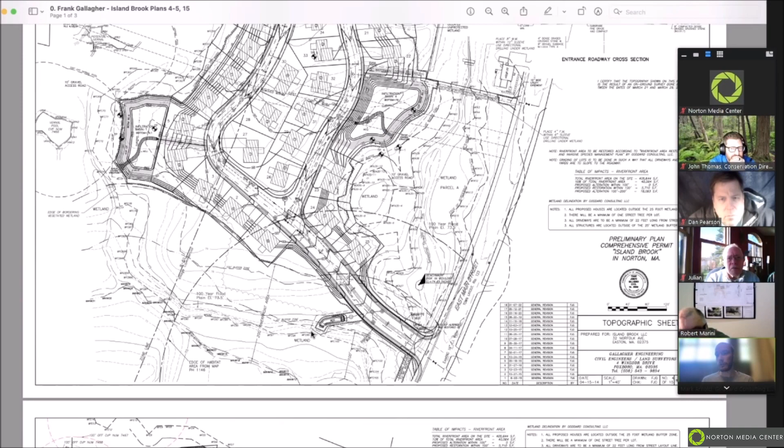In addition, since it's been many years on this project, the wetland line was reviewed along with the vernal pool flagging by Mass DEP as part of this process. There was a reduction in wetland impacts from 790 square feet down to 170 square feet of permanent impacts.

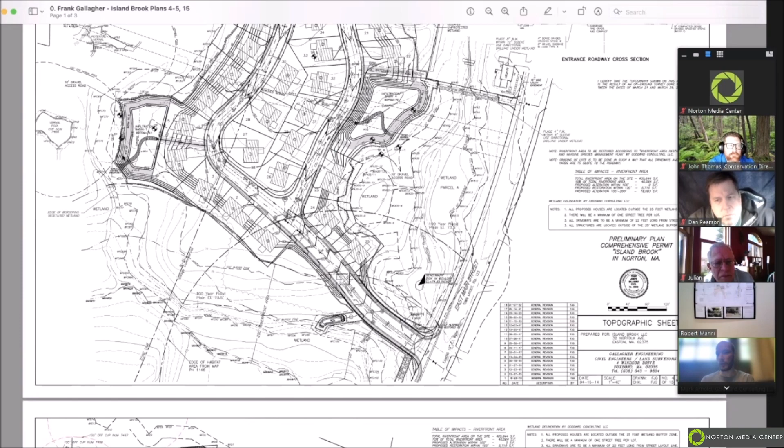Basin 1 and Basin 2 also saw reductions in work. This is Basin 1, where work was tightened in the buffer zone so all work is no longer within 100 feet of a vernal pool, whether potential or certified. Basin 2 is over here, where work was again tightened up to maintain 100 feet of setback from the certified vernal pool.

In addition, there was reconfiguration of the other basins in small ways, changing of grades to respond to DEP's comments about how stormwater was flowing, making sure discharges and volumes were maintained. Finally, there were some minor roadway elevation changes that occurred—these plans would be hard to tell, but they did occur.

There was additional work to pull back from this isolated wetland, which is no longer being impacted in any way. This other isolated wetland is still being proposed to be impacted, and Mass DEP is making that clear in the settlement discussions. The purpose of the settlement is to prepare a final order of conditions.

Last, there was an update to the Riverfront Area Invasive Species Management and Restoration Plan, put together working with Natural Heritage, which has endangered species freshwater mussels mapped within the Rumford River. Part of that work is improving the riverfront area near the actual endangered species habitat mapped by Natural Heritage. That was updated to reflect the updated plans, since the ISMP was using the old site plans.

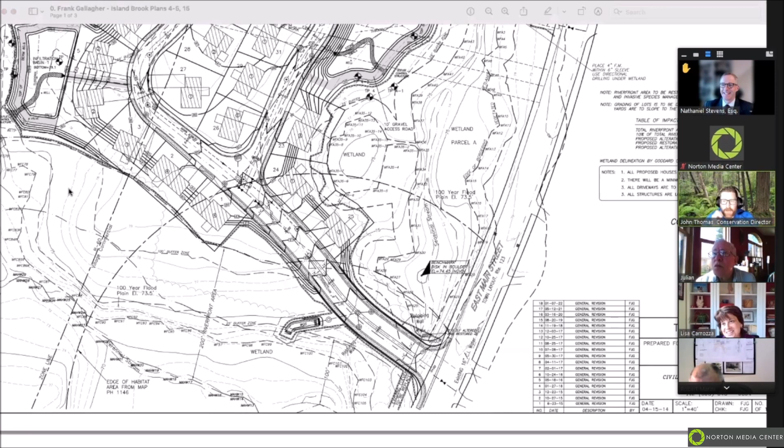We should probably let our counsel speak as well. Yeah, I would let Nathaniel answer all these questions for us.

Okay, thanks very much. Good evening, everyone. I'm not sure if all members of the commission were even with us when the commission last saw this project. I was looking at my files - it was January of 2018, so four years ago. It has certainly been a while. I've been serving as special town counsel for the commission on this. I recall meeting many of you at the site visit DEP held for the SOC back in, must have been sometime in 2019.

Anyway, where we are at this point: Mark has given a good overview of the changes in the project that have come about due to John's comments - both John Thomas and John Chesia's comments - as well as DEP's comments. At this point we are waiting for DEP to issue a draft final order of conditions for everyone to review and approve, and that's not ready yet. We're still waiting for DEP. We're not quite sure what the status is, but that would incorporate the proposed conditions. We will include a condition about keeping things as far as possible from the 25-foot buffer zone, which is really a local requirement - not a DEP requirement - but the applicant and DEP are willing to accommodate a condition that alludes to that. So that's where we are overall.

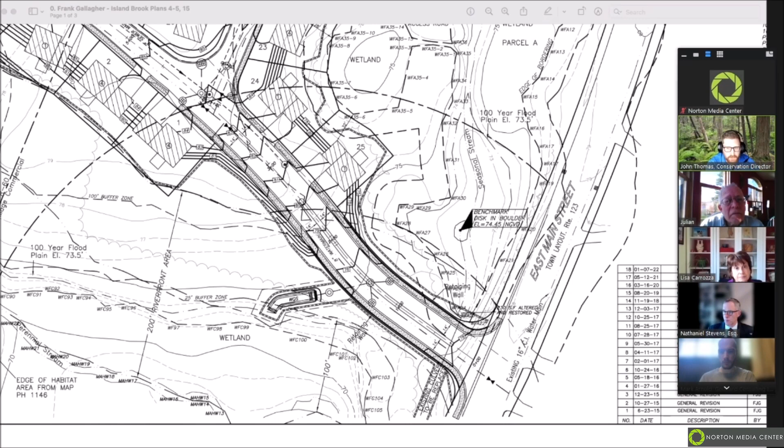Well, I think we should also talk about jurisdictional authority here too, I think it's important to understand that. So Nathaniel, do you want to advise the commission on what authority they have for this project? Sure, well I guess Lisa's point is well taken. Although it's work required by natural heritage, it is occurring within the commission's jurisdiction under the Wetlands Protection Act. So the design and the goals of the work are set by natural heritage under the Massachusetts Endangered Species Act, sure.

But the work is happening within the riverfront area, if I'm remembering the plan correctly, within the buffer zones, so certainly the commission can take a look at it and comment as a party to this proceeding. Right, thank you, so if I could get a copy of that as well.

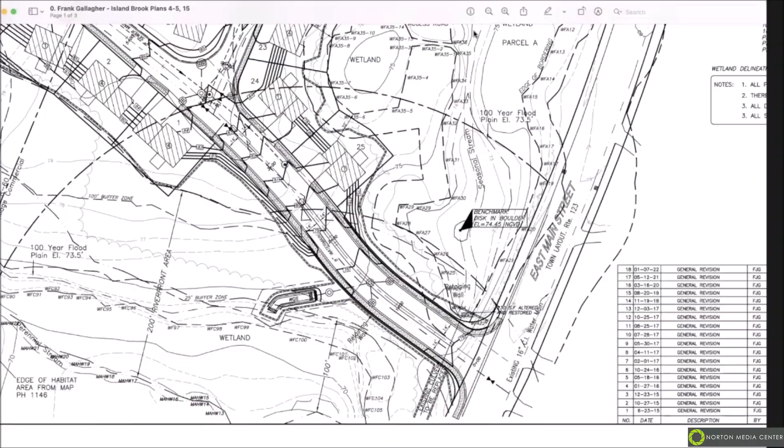And then if we could go back to the plan for a second, the only thing that caught my eye was some of the, you mentioned that most places were taken out of the 25-foot, yet you seem to have some grading on the northwest side of the road into the 25-foot. I'm just wondering if you...

So I noted which lots had work reduced. There were areas originally under the denial that the commission wanted restored in the 25-foot buffer because of grading and disturbance. Those areas were all pulled back, but there's certain areas where it's impossible to pull outside the 25-foot and make the project accessible, to access the front of the site, to maintain work outside the inner riparian zone, which is a goal of the riverfront standards. You have to work in the 25-foot buffer to cross this entrance right here.

Yep, so I'm with you, but I'm asking about a specific location though. So again, right here, a retaining wall on that road. I mean, I get you have to make that crossing, so there are retaining walls on both sides of this wall.

Yep, not talking about here. If you listen for one second, follow the road, northwest side, you're showing grading in the 25 foot. And I'm just wondering, did you try to put a wall up there? I don't, so which, are you, is it on the other sheet?

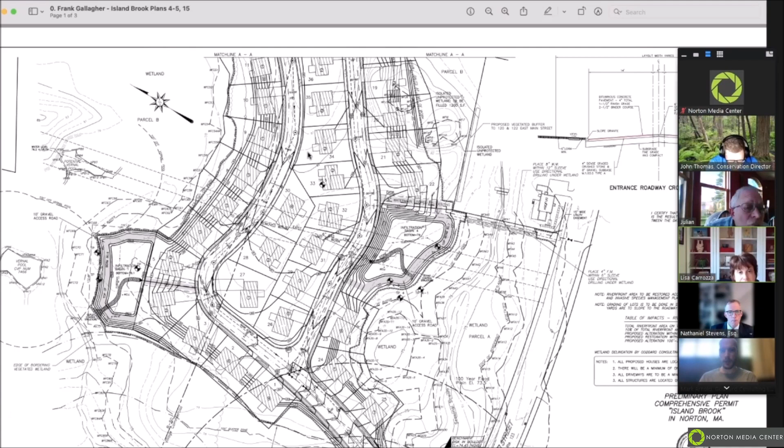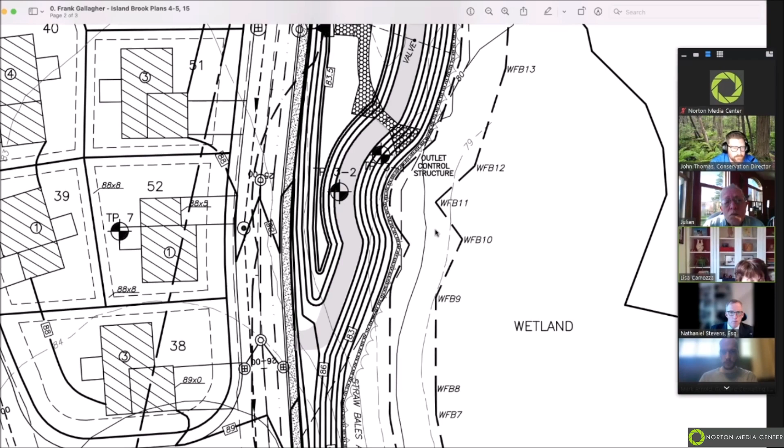I don't see a road on this, probably on the other sheet. All right, so I'll go over here, I'm glad to show it. I mean, I am confident that there's no other 25-foot buffer on this whole loop. Right, yeah, if you just zoom in right there, northwest, right by the flag, other side. That's northwest, other side.

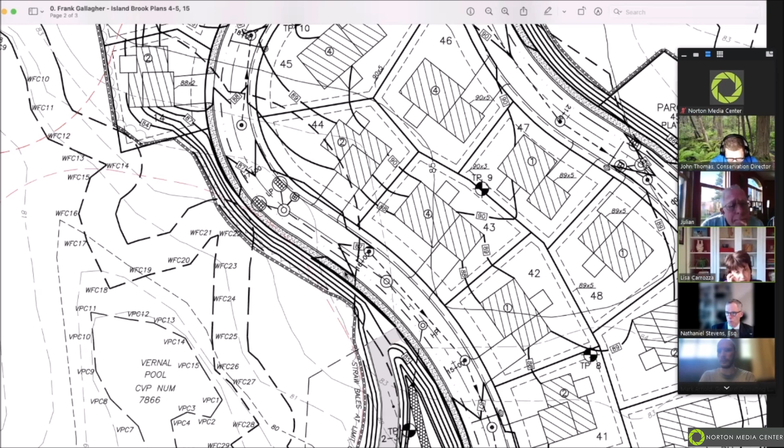So northwest is over here. The road, yeah, you're right, there is some grading right there in the 25 foot setback. Yep, and that's close to original. I mean, we pulled back work along this whole side. What I'm asking is if anybody considered putting a wall up there to eliminate the work in the 25 foot.

We've never been... all I'm saying is you will see that as one of my comments to DEP, understood, to minimize impacts. So those are the types of things I'll be looking for in this plan set.

May I make a comment? Sure, go ahead. When we have the revised plans, or when we get a copy of these plans, could we have the 25 foot line, et cetera, delineated a little more clearly, maybe with a highlighter or something? Dana, I can highlight the plans for us. Okay, thank you.

I think that kind of emphasized in detail what I was going to say in general, and that was that the difficulties we had with this project, the suggestion was to reduce the number of house lots and make adjustments that would address the concerns of the commission. And this new plan does do that, so I am much more comfortable with this. I think Lisa has drilled down on the details effectively, and that will distill our specific comments back to DEP. I personally think this is an improvement, and that would be part of my feedback.

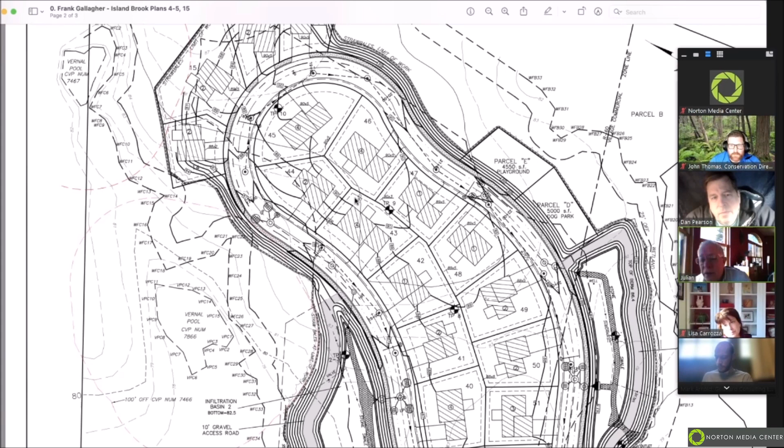So we can go ahead with any comments from the audience. I don't see any hands up, but again, as is the practice with these Zoom meetings, you can go to the reaction button, there is an option to raise your hand, or you can just unmute and ask your questions. But I don't see any questions.

So unless there are other specific items or questions to be addressed, I think we can... this is not a regular hearing, this is just an open discussion. Is that correct, John? So we don't vote to continue this at a later date, but once we have plans to review and specific comments to feedback, then we can have an additional discussion if needed.

Yeah, this was basically a preliminary discussion to set the stage for the commission on what to expect moving forward, because we're still waiting on DEP's draft order. Once we have a draft order, we can see what their conditions are and whether we have any comments regarding those conditions. I was waiting until things were more finalized before going back and forth, because that's kind of been what's been delaying this. So I'd rather get a good bare bones status for this, for the commission to do a thorough review in good detail, and not waste anyone's time.

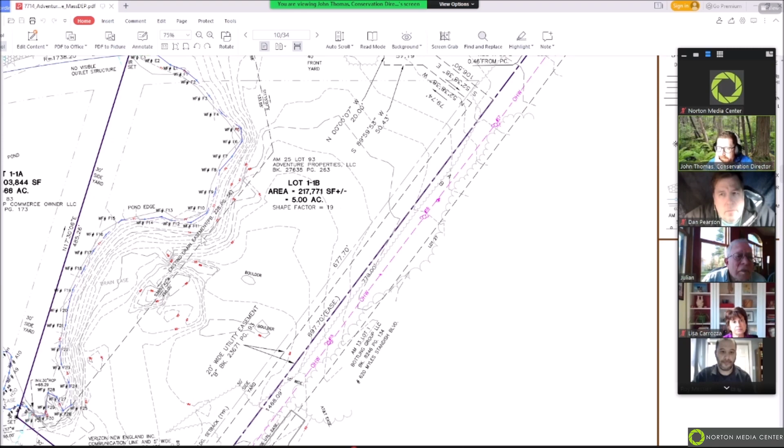So you can see the flags on the westerly side of the property. They were delineated by ECR on March 18th, 2022, surveyed in by Hamlin surveyors. And the property owner is looking to have John Thomas confirm the flagging boundary. And I have walked the perimeter, I have looked at all these wetland flags. It's a bottom of slope, it's next to an inundated wetland, and it was a nice delineation. I didn't have to change any flags as they were all pretty conservative.

And yeah, it was just the series. I think it was an A flag and then a couple F series and I think 3 or 4 E series flag series. But it was fairly decent for the delineation, and I am confident that the area conforms to the Wetlands Protection Act and also the delineation manual that DEP provides.

Okay, now normally we don't comment on what development is coming here, but yes, we did provide as one of the plans the setback and the erosion control measures. So I'm assuming we're going to be expecting another filing in the future on what's going on with this. Correct, right. Currently the owner is looking just to clear some of the site, none of the large trees, just some of the brush and vegetation, for future development.

Any questions from any members of the commission?

Just a comment for the commission: I've been in talks with the landowner and the applicant for this project, and they are aware that any clearing without a permit may trigger the need for a stormwater permit. They'll potentially come in for a notice of intent application if the project involves work within the buffer zone to this resource area, but that's not part of this permit. I just wanted to make that clarification.

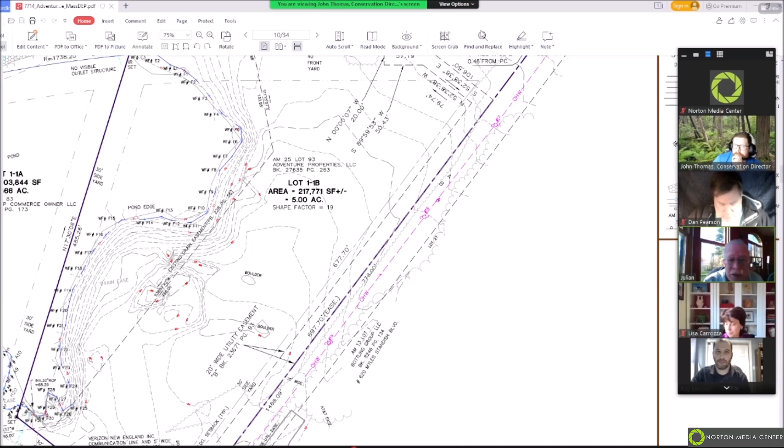This seems rather well demarcated, in that there's a kind of steep bank and it's well defined as to exactly where the boundary is. So I'm assuming this is something we can close and proceed with. I have generated a draft order for the commission's review. I had one comment from Lisa that I've taken into consideration and changed.

I don't see any hands up, but if anybody in the audience has a comment or question, take your mic off mute and ask it. Otherwise, we'll proceed to a motion to close the ANRAD hearing.

Seeing no hands and hearing no questions, we'll proceed looking for a motion to close the public hearing for file number 250-1102. So moved.

Looking for a second. Second. We have a motion made by Dan Pearson, seconded by Ron O'Reilly, to close the public hearing for file number 250-1102. Roll call vote, starting with Mark and Thomas: Aye, aye. Ron and Dan: Aye. Lisa, I believe, is abstaining. And I will throw in an aye.

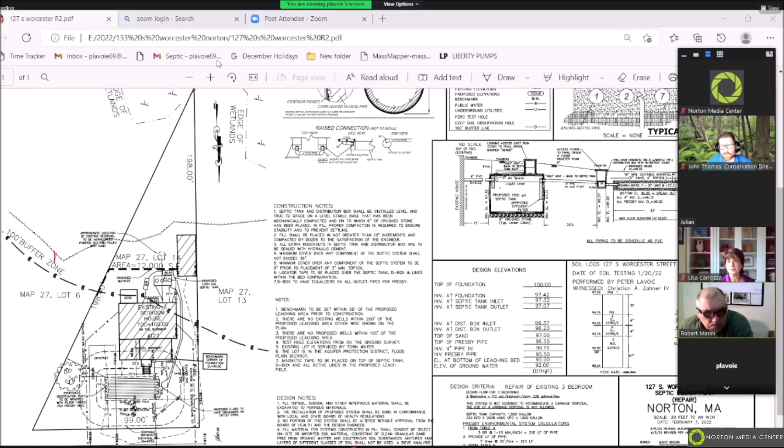So our next item is determination number 1122, a request for determination, 40 Howard Street, Wheaton College, concerning a proposed project to install a drainage pipe that will tie into an existing catch basin within 100 feet of wetlands. Do we have a representative of the applicant for this project?

Hi, yes, good evening everyone. I'm Alex Horgan with Bohler Engineering, representing Wheaton College for this project. Alex, you have screen sharing capabilities. All right, why don't you go ahead and describe the project?

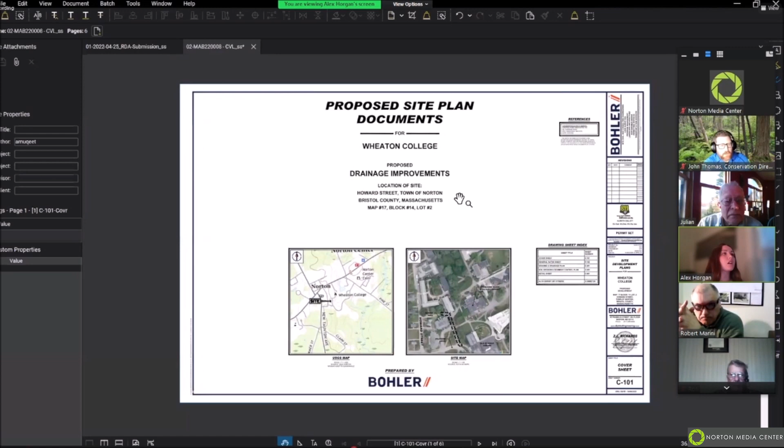Great, thank you everyone. So we're before you today with some minor drainage improvements on Wheaton College. We can all see that screen—just to orient everyone a little bit, these improvements are on the Wheaton College campus. It's not quite there yet. Yeah, the image hasn't appeared yet. Okay, there we have it. Got it. Okay.

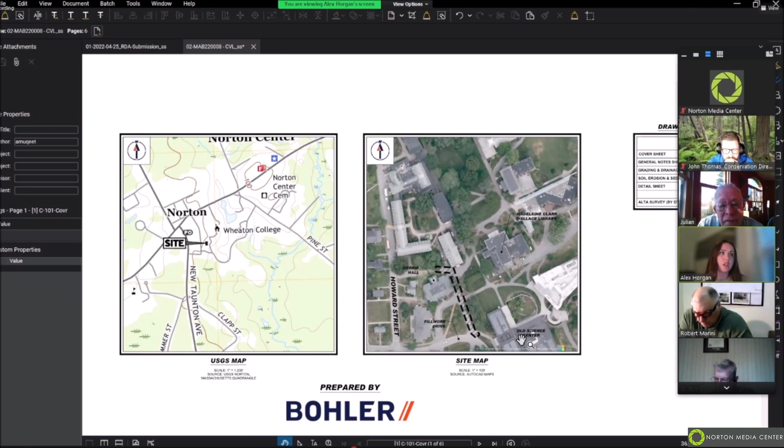These drainage improvements are going to be on Wheaton College campus, orienting yourself here right next to Gebbie Hall, running down this access drive right by the old Science Center, which was actually before the commission a few years ago for an NOI, and the wetlands that were delineated with that NOI and those plan approvals are the wetlands shown on our project where the work will be done.

The overall plan proposes to install some additional drainage pipes, basically to help with some flooding issues around Gebbie Hall that they have in existing conditions. There's an existing pump station that these pipes will be tying into to help outfall water in larger storm events and drain down to the existing wetland area.

The reason we are before you today is because we will be having some minor work within that 100-foot wetland buffer. There's an existing catch basin, roughly 4.5 feet inside the 100-foot buffer zone, that we'll be tying into with a proposed pipe. There will be no grading changes of any kind within this buffer zone and no additional structures, just tying in our proposed pipe to this existing structure.

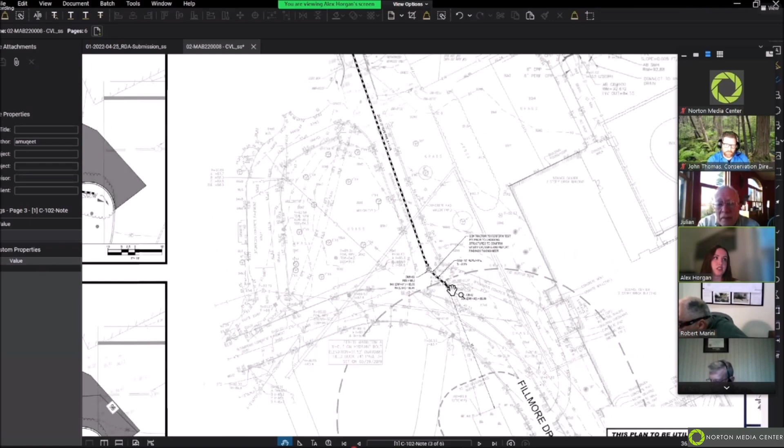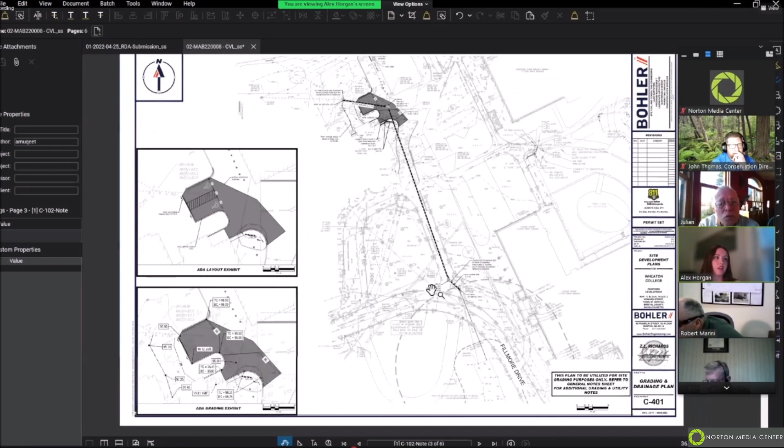And the drainage patterns will remain the same as they do in the existing conditions, with this water ultimately outflowing to these existing wetlands. Additionally, for the project itself, we're proposing a little bit of grading changes up here to help with some more positive drainage. And in this plan set, we've provided minimal erosion control devices for this proposed work as well, compost filter sock as well as inlet protection.

So before you today, hoping that this information is sufficient and we'll need no additional filings to get this proposed work underway.

So John, this almost to me seems like something that could be handled with an administrative decision, but did they just come before you with the application? Is that what happened here? Well, given Wheaton's track record of always filing permits, I thought that maybe they should keep going. No, I wasn't part of all the original projects and the wetlands resource area. So, I mean, this is technically within the jurisdiction of the Concom.

If the commission feels that these sort of projects are worthy of administrative approval, I'm more than happy to do so. That way the commission doesn't need to see these sort of projects. All right, that's fine.

I'm certainly comfortable with this application, but I'm also comfortable saying I've seen enough, unless there are questions among members of the commission that would need further information. So anybody have a question about this?

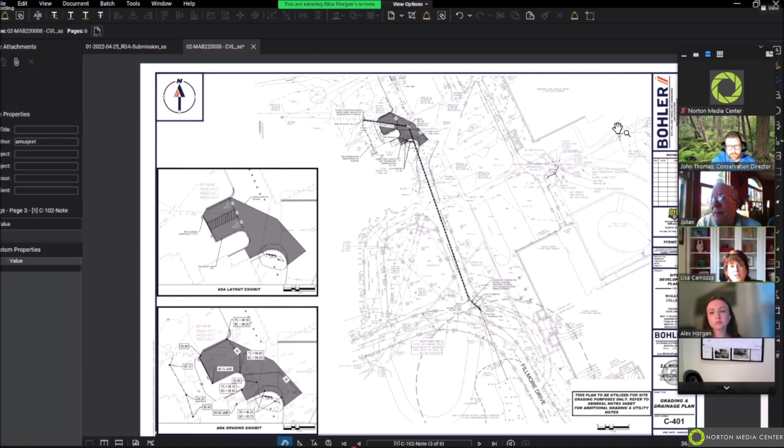Alex, I was just wondering, what is it that's ponding right now? If you could just zoom in. What are you trying to alleviate the flooding from? Is it a parking area? Is it a low spot in the lawn? Can you just describe that?

Sure. So there's an existing pump station here that's collecting water, and the issue they're having now—you can see some of this existing grading—is actually some ponding issues up towards the building and these door locations. So the idea is to regrade slightly to get positive drainage away from the building. You can see there's a little grading within these ADA spaces as well, which are shown here. This is just a close-up of the grading plan to help with that drainage.

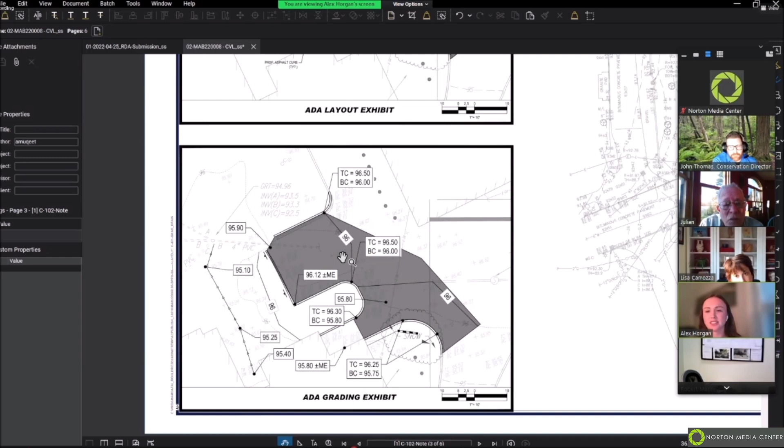So it's flooding both, looks like maybe a lawn and some parking? I think the main issue is within the lawn and these door locations here. We're just going through to make sure the ADA is up to code while we're doing this work.

Okay, and does that line currently have any stormwater quality features on it? Are there any water quality structures? I do not know, I think we would have to do further investigation. I just know that there's a pump station there. I don't know that we had it picked up.

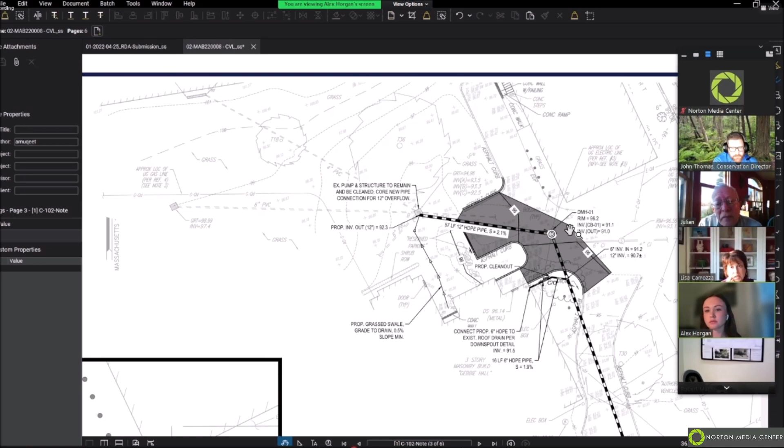All right, that's fine. I mean, it's a short run. It's hard to tell what it's taking water from, but what is the pump station collecting? Is it campus-wide stuff or? I do not know the full extent of that pump station.

I can jump in on that one. My name's Zach Richards, I'm the project manager and engineer of record on this one. So it's an area you can see in the distance, there's actually a small catch basin structure. There's a small trench drain shown on the upper left-hand corner of that grassed area that ties into that structure. If you look at an aerial, there's a lawn area and some pavement between buildings there that tie into that structure. So it's a combination of some roof runoff and some small paved areas, but mostly lawn area that collects there and ponds because it has nowhere to overflow.

It's really during the large storm events that they're running into issues, because of both the way the grading's done in that area and the size of the pump during extreme storm events. They've run into flooding issues as we get more extreme events. So I don't think there's any big water quality treatment, but again it's mostly grassed.

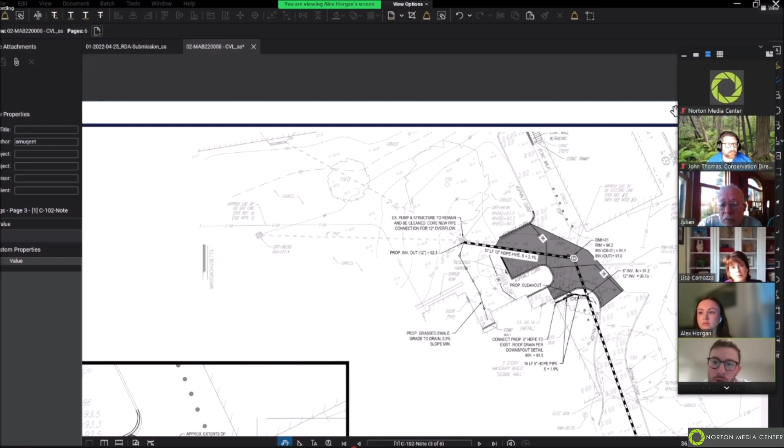I'd be happy to add a hood on the outlet pipe we're putting in there as an extra measure, it's kind of an easy add for treatment. And I know where we're tying in, this is kind of an overflow during large events. That existing catch basin has a hood as well downstream, so it's going into another deep sump structure with the hood.

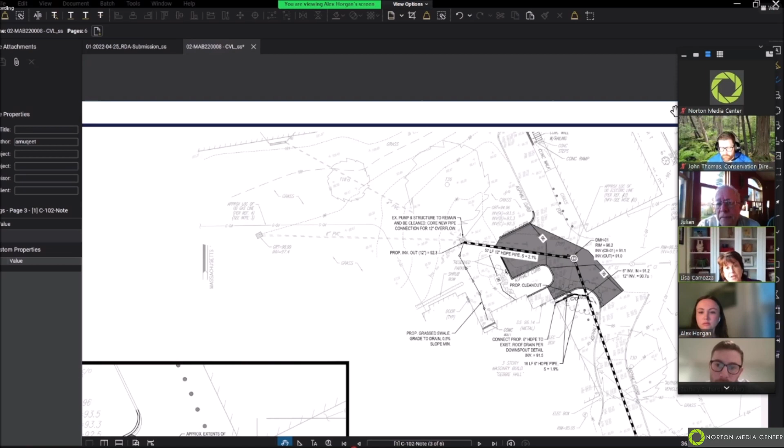Okay, so it doesn't seem like—well, I don't want to say de minimis—but not a significant pollutant-generating flow. Correct. Yeah. Okay, thank you. No problem.

All right, any additional questions on this request for determination? So it appears this is something we can go ahead and close. Is that your opinion, John? Yes, it's my opinion that the commission, at their discretion, can close this.

And it sounds like we can also consider a negative determination vote on this as well. So first, we need a motion to close determination 1122 concerning 40 Howard Street, Wheaton College.

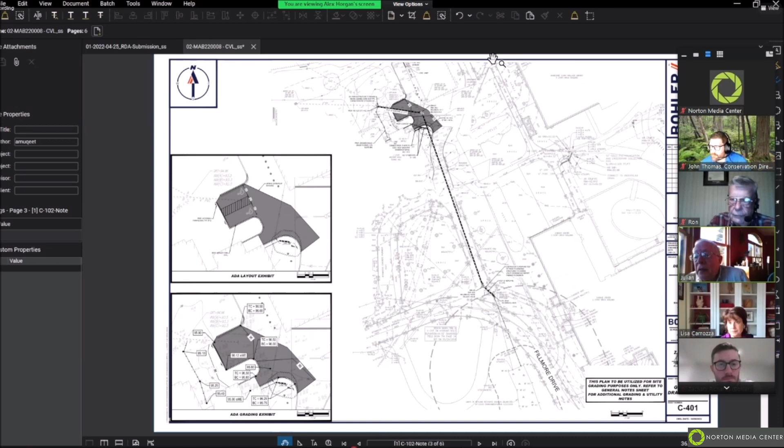I'll make that motion. Second. We have a motion made by Lisa, seconded by Dan, to close the public hearing for determination number 1122. Again, a roll call vote starting with Ron and Tama. Aye. Aye. Mark and Dan. Aye. Lisa. Aye. And I'll throw in an aye. So the hearing is closed. We can consider a motion potentially for a negative determination.

I'll make a motion to issue a negative determination for file number DET 1122. Motion made by Lisa and seconded by Mark Fernandez.

Roll call vote starting with Mark and Tama, aye, aye. Ron and Dan, aye. Lisa, aye. I'll throw in an aye.

The motion carries for a negative determination, which means you can carry out the project as illustrated on the plan. Thank you guys for coming tonight. Great, thank you all, appreciate it. Have a good night.

Our next item under continued public hearings is file number DEP 250-1070, concerning a notice of intent for 0 Rear Eddy Street for Wyandotte Share Corporation. My agenda states they have requested a continuance to June 13th.

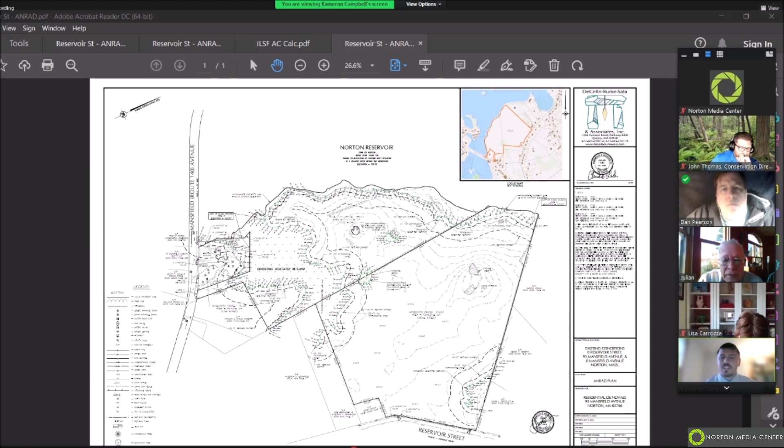So you guys saw this, I believe, back in February, and there was a site walk with John. We understand the calculation was purely just to do the ILSF. We understand the matter that it can be a vernal pool, and that has its own limitations and buffer zones and whatnot.

So I just wanted to make that clear to the commission, that I think this pool, based on my observations, is definitely a certifiable vernal pool under natural heritage criteria.

So John, I think what you're leading to is that the finding would be that it is, because it doesn't sound like they can provide evidence that it isn't, right? Right, I have visual confirmation and everything like that, so I would say it is a certifiable vernal pool. Whether the applicant wants to certify it, that's up to the commission and also the applicant to make that determination.

I think it's important to protect the home of a lot of these critters from an environmental perspective. It's a very sensitive resource area. I know the Army Corps of Engineers is going to be interested as they go through the progression of this project and move forward on what they intend to do for this piece of land. But it's definitely important, especially if they're intending to do some crossings or wetland impacts, it will all play into protecting this area even more.

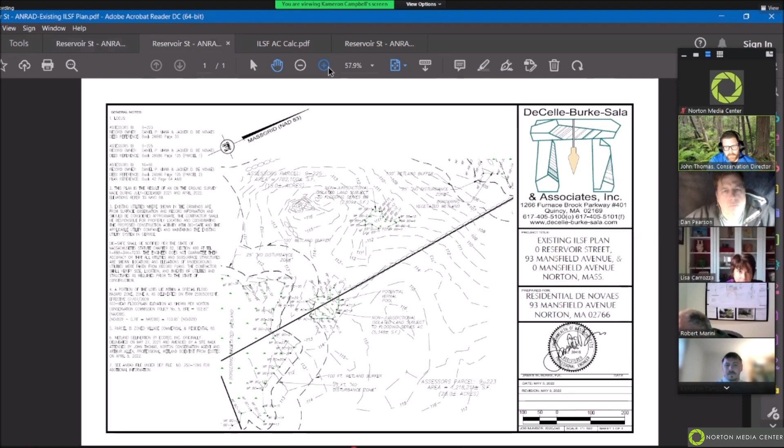So the other one, I checked on this Thursday, there's still about 2 to 2.5 feet of water in this pool right here. The one to the north is completely basically dried up, I think there might be less than 2 inches of water, and I didn't come across any egg masses or tadpoles there originally. So I'm confident that one is not a vernal pool, but the one I identified within the AC wetland, I definitely believe is, based on my observations.

So John, I guess in this instance we'd defer to you on whether everything's buttoned up. Well, we need more topo for the record. I think it's important to get the plan to really certify that it's not ILSF, so the commission can make that distinction. It may not be ILSF, therefore may not be a locally or state protected resource area, but if you're going to write conditions, have it noted that Army Corps of Engineers may get involved at some point. I think it's important to have within our conditions that there may be other issuing authorities or agencies that would need to approve any impacts or disturbance within 100 feet of this known vernal pool.

Yeah, it's still protected under the water quality certification regulations under anti-degradation. So, okay.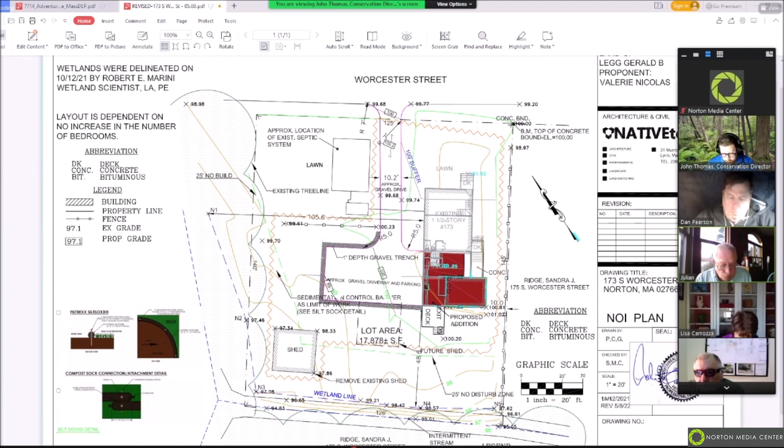I'll make a motion to close the public hearing for file 250-1101.

Motion made by Lisa and seconded by Dan. So roll call vote, starting with Lisa and Tama. Aye. Aye. And Mark and Ron. Aye. Aye. And Dan, Aye. And I'll throw in an aye.

So the public hearing for notice of intent file number 250-1101 is closed, and we'll be producing an order of conditions next time with that little note to be added to the plan that you'll provide. Thank you. Good night.

That ends our public hearings. Our next item on the agenda is issuing an ORAD, DEP file number 250-1099.

I guess this would be an ORAD that we're issuing for 68 Leonard Street. And I just have really a point of information question. The only thing I saw on this, the version I got at least, in item 6, April is missing the R.